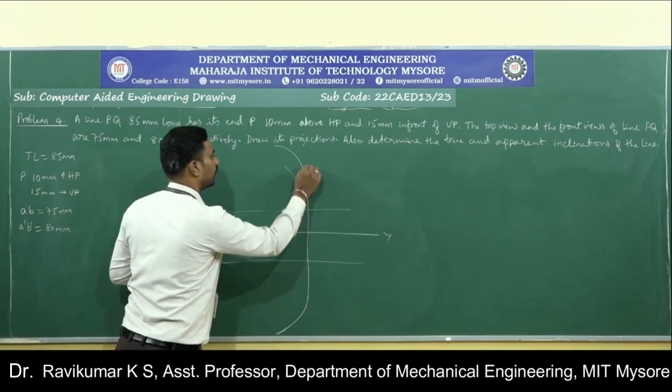Wherever the line falls on this curve, but if you try to make this line parallel, it should be at this point. If you extend the curve for the radius of 75 mm, it will reach up to this point where it will appear parallel to one of the planes. So from this point, if you project, you will get the true length in the other. So if you just extend this curve, wherever this curve and this line cuts, that point will be the true length.

So this is the concept. So I need to measure 75 mm like this. This is 75 mm. Okay, I don't know on which exact point the other point Q falls, but I know the radius. So I can use the radius and this point P to make it parallel. That is what I am using. It is the constructional tip. So using this radius, I have made it parallel. From this point, if I project it, I will get the true length.

Similarly, here it is 80 mm. This is 80 mm, P dash and 80 mm. I have the radius. I don't know on which point the exact apparent length Q point falls on this curve, but I have the radius. So if I try to draw the curve 80 mm, and if I made it parallel, it should be up to here, because P dash is here. This line is appearing parallel now.

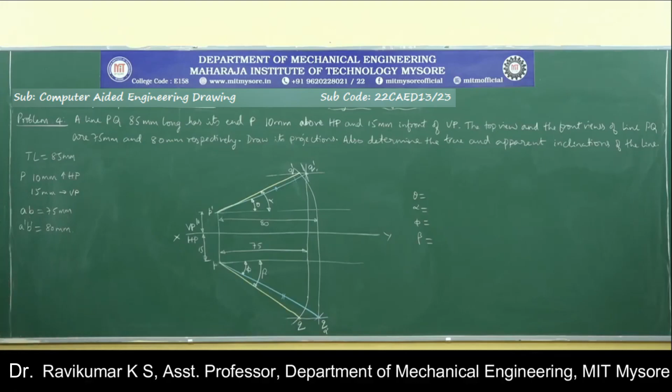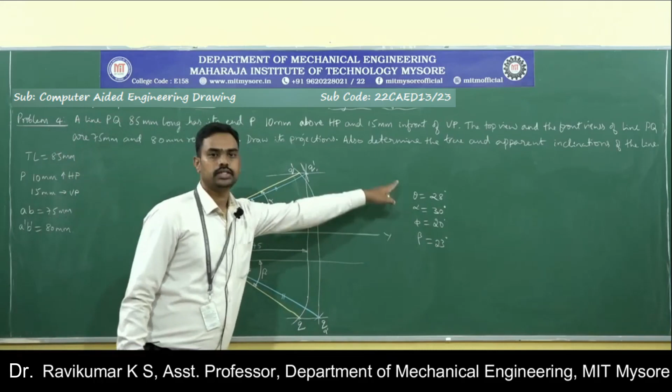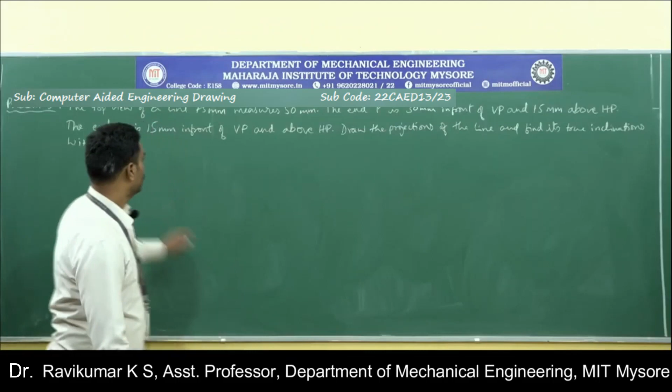So if you draw this problem to the exact scale and measure, you will get the angles as 28 degree and 20 degree, alpha and beta 30 degree and 23 degree. So if you draw this problem to scale in your sketchbook, you will get these answers. So this is how you need to solve a problem when the angles are not given, only the distances are given.

Okay, so the next problem, problem number 5. The top view of a line 75 mm measures 50 mm. The end P is 30 mm in front of VP and 15 mm above HP. The end Q is 15 mm in front of VP and above HP. So the information above HP is not given. Draw the projections of the line and find its true inclinations with HP and VP. So we need to draw the projections and find the true inclinations, that is theta and phi with respect to HP and VP. So just analyze the problem first.

The top view of a line 75 mm measures 50 mm. What does it mean? It means the true length of a line is 75 mm, okay, and the top view of the line 75 mm is measuring 50 mm. So the apparent length is 50 mm because apparent length will be shorter than the true length. Therefore, this is the true length and this is the apparent length.

You just analyze. The top view of a line 75 mm measures 50 mm. Here, the top view is measuring 50 mm. Therefore, 50 mm is the apparent, 75 mm is the true length. So, true length is 75 mm. The top view means it will be below XY line, that is AB, or here it is mentioned as PQ. So, it is PQ, small letter p and q, 50 mm.

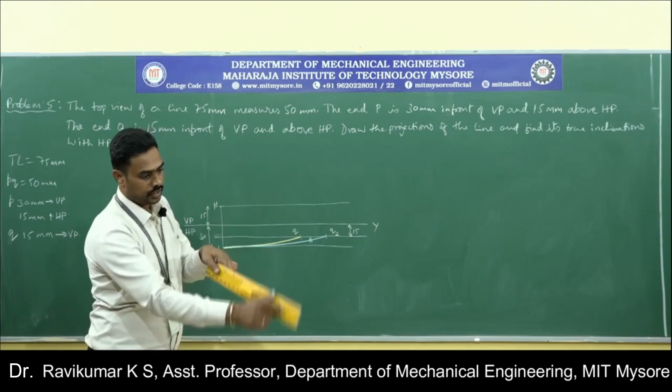In previous problems the line was kept like this. It is inclined to VP something like this, towards the observer. This is the plane, this is the line, and you are the observer. So the inclination was given towards the observer, so that when you project these points onto the horizontal plane and join them, then if you tilt it, you will be getting the view something like this. But in this case the inclination is given with respect to VP towards the plane instead of towards the observer.

Here in this problem the inclination is given towards the plane like this, so that if you project this point onto the horizontal plane and if you project this point onto the horizontal plane, then if you join those 2 points and if you tilt it, you will get the inclination like this. So inclination something like this, not like this. Okay, you will get inclination something like this when the inclination is given towards the observer. So this, the inclination is given towards the plane. That is the difference between the previous problem and this problem.

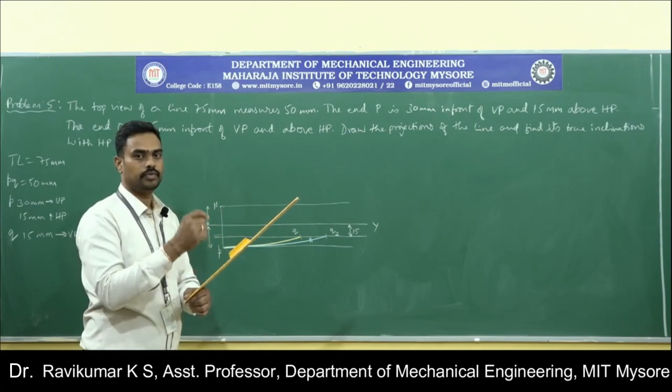Okay. Similarly, you need to take off the inclination to get the apparent length and true length, and to get the view like a line parallel appears parallel to XY in one of the planes. You need to rotate it and you need to convert the inclination to both the planes into a standard case, either case number 4 or case number 5. That is what you need to do to get the true length. So here we know that PQ is the apparent length. Rotate PQ, make it parallel, then project it on to the other plane to get the true length.

So I am selecting P as center, PQ as radius. I am rotating this until it appears parallel. So P and this point is appearing parallel. So from this point I will project it. And I know that on this projection line the true length will fall because it is rotated and I made it parallel. So if a line appears parallel in one of the planes, I will get the true length in the other.

So here I need to get the true length, and I know that true length is 75 mm. Take your compass, select 75 mm distance, select P dash as center, you cut 75 mm here, you will get the true length. So join these two to get the true length. This is the true length. Now once you get the true length and this point P dash and Q1 dash, you just draw a locus with that point. Then you need to get the apparent length here.

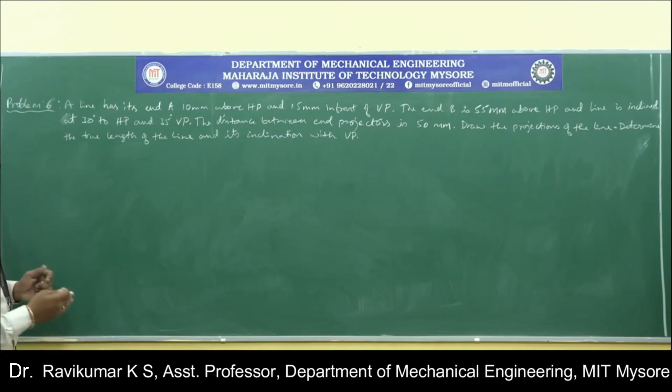Okay, coming to problem number 6. A line has its end A 10 mm above HP and 15 mm in front of VP. The end B is 55 mm above HP and the line is inclined at 30 degrees to HP and 35 degrees to VP. The distance between end projectors is 50 mm. Draw the projections of the line. Determine the true length of the line and its inclinations with VP.

So here distance between end projectors is given. Distance between end projectors, as I said in the earlier problem, is the horizontal distance between the two projectors, A dash A, B dash B, or P dash P, Q dash Q. Distance between the end projectors means the horizontal distance between the two projectors of the points of a line.

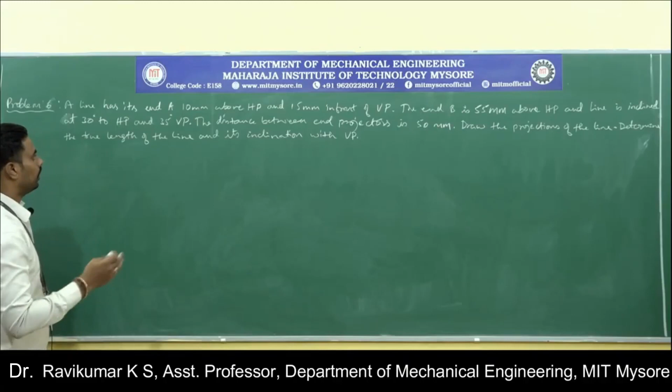So we'll start with the data. 6 data are there. We need minimum 5 data. Here 6 data are given, so we can solve this problem easily. So starting with the data, a line has its end A 10 mm above HP and 15 mm in front of VP. So I will start with the XY line.

X, Y, VP and HP. End A is 10 mm above HP. So 10 mm above HP, I am going to write the locus of A dash. Then 15 mm in front of VP, so 15 mm in front of VP, I am going to write the locus of A. So this is 10 mm and this is 15. Remember, you need to maintain a minimum 8 mm distance between the projector line and the dimension line, or between any two lines. Okay, 15 mm.

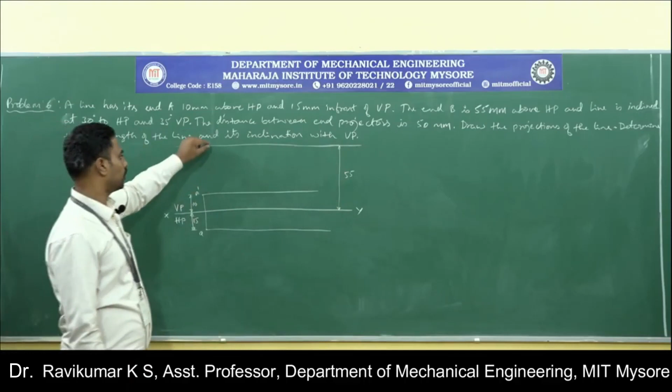The end B is 55 mm above HP. HP means XY line, so from the XY line it is 55 mm. So measure 55 mm from the XY line and mark or draw a locus for 55 mm. So end B should be located anywhere on this line. That is the locus. And the line is inclined at 30 degrees to HP.

So 30 degrees to HP means in the front view, then 35 degrees to VP in the top view. So for 30 degrees, take a protractor, keep it here, measure 30 degrees and draw the 30 degree line. Wherever that cuts the locus, that will be B1 dash, where this is 30 degrees. It is the given information. Here the length was not given. Instead the height of point B from HP is given and the true inclination is given. So true inclination is 30, and with the help of that I am able to locate this one.

Then with respect to VP it is 35 degrees. So keep the protractor inverted here, measure 35 and draw a line. You will not know where to stop this line, because here it is the junction between the locus and this line. You have stopped the line there, but here you don't know where to stop the line. So keep it as it is for now.

Now the distance between the end projectors is 50 mm. That means the distance between this line and the projector of B, measured from the apparent length line, not from the true length line. This is the true length, because this is the true inclination. It is not associated with any views, and it is not given as 'appears to be'. So it is the true inclination, therefore it should be the true length. I will use blue color to represent true length.

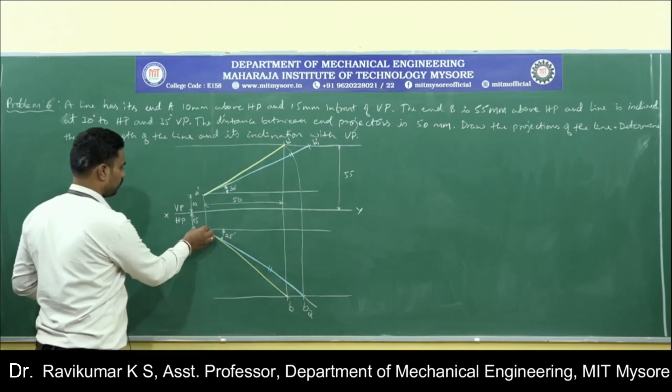Once you get this point, just draw a locus from this point. So this point will be B2. Wherever this locus and the distance between end projectors line meet, that will be the point B. And if you join A and B, that will be the apparent length. So this is the apparent length. Okay, so this is how we need to solve the problem.

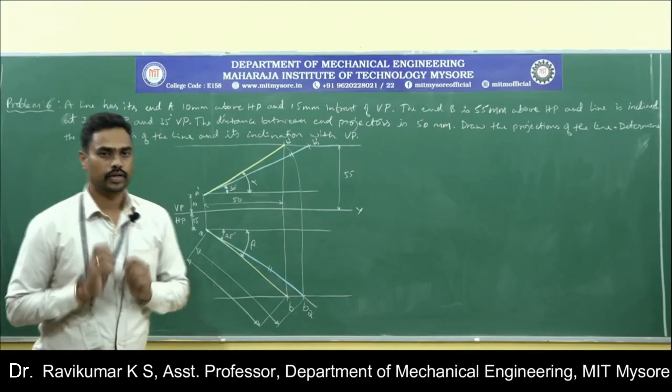Now the unknowns: draw the projections of the line and determine the true length of the line. So measure the true length from here to here. Your apparent inclinations will be alpha, this one, and here it is beta. And you can measure the apparent length from this point to this. So this gives you the apparent length, this gives you the true length, and these two give you the apparent inclinations. So this is how you need to solve a problem when the distance between end projectors is given. Here the length of the line was not given, but the distance between the end projectors was given. Okay.